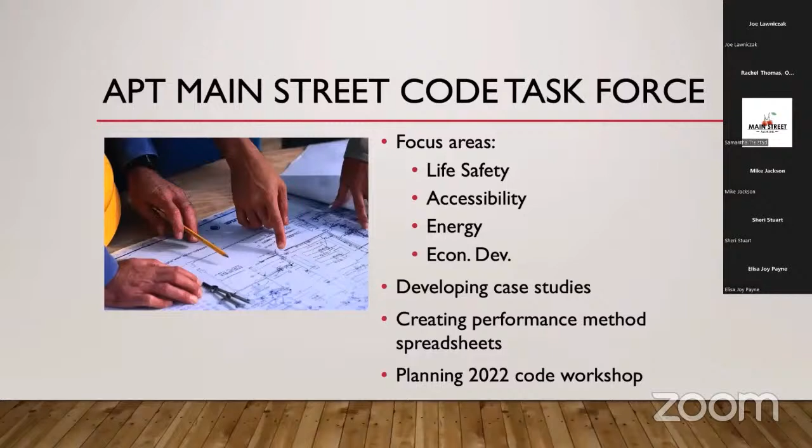We've actually developed an Excel spreadsheet on one of the code methods that we're sharing. So we basically got going in 2020 during COVID, and in '21 we developed it, and now this year in '22 we'll have our virtual workshop in two weeks.

What came out of our effort is this 3-day workshop on building codes on Main Street. It's virtual, so we're going to be across the country. The price is very affordable, and we have a special rate if you're an APT member, a Main Street member, a Main Street community, or a government, meaning a code official. Relative to other conferences, this is a very good price for the amount of training you're going to get. We chose this interesting model of meeting from 10 to 3 Central Time each day, so if you're on the West Coast, that's 8 in the morning, and you'll get your afternoon free. If you're on the East Coast, you start at 11. It's 4 hours of the middle of the day each day, and you can still get some work done. We hope this model works to serve a national audience, and it's not too late to sign up.

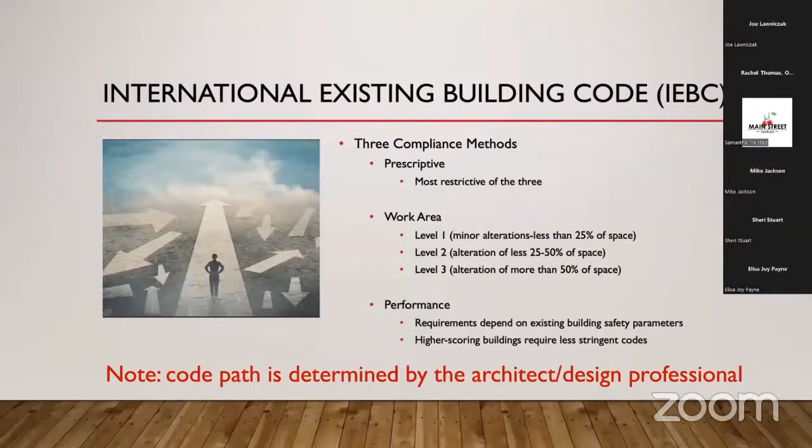You are typically, my audience today—I'm assuming you're Main Street directors, responsible in the community—you're going to want to know what this code stuff is about. Some of you are working with programs to maintain inventories about your buildings and information about them: how big they are, their current use, occupancy, type of construction.

Some of this could be useful for an owner looking at rehabbing, because you may have historic data on the former occupancy of the building and its historic designation or not. So if you're maintaining some sort of inventory of buildings, think about what fields are in your inventory that might be useful from a building code standpoint. Probably you don't have construction type in your inventory if you're looking at occupancy issues, but maybe that's something that would be useful to you.

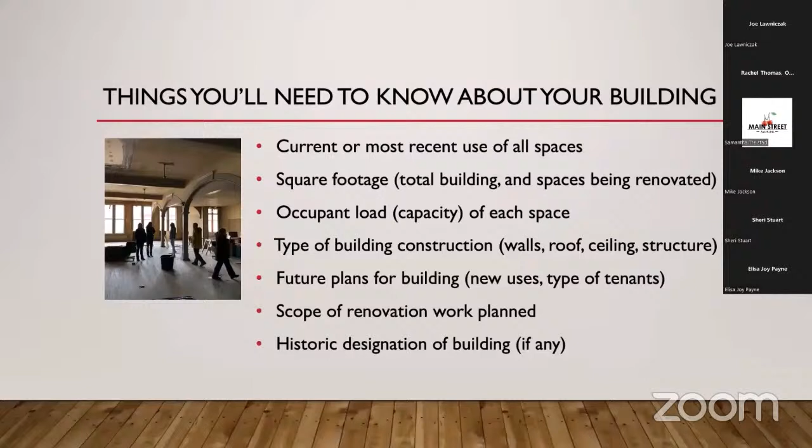Interesting—I haven't talked with the folks at Main Street for a while about their sort of proprietary downtown inventory software, how far they go on that.

But the code, in its most basic way, works from occupancy type. We've evolved building codes over the last 100 years to very carefully start with the assumption of what kind of use is in there, and that use drives the different levels of safety needed. High hazardous use requires lots more things, as does assembly use, where you've got large crowds gathered.

Typically low-end uses with not a lot of people—storage, mercantile, and business uses—are oftentimes very low-end as well. But business and mercantile uses can be higher depending upon what you've got in them. So this is their world—when you get together with code officials, I'll tell you they rapidly move into talking in acronyms.

So I see here that there's 4 different levels of residential use, from R1 through R4. It's always bothered me. R1 is the highest use of residential, larger multifamily and institutional, whereas R4 is sort of the lowest end. I think they got the numbers wrong when they did it, but that's the way it is.

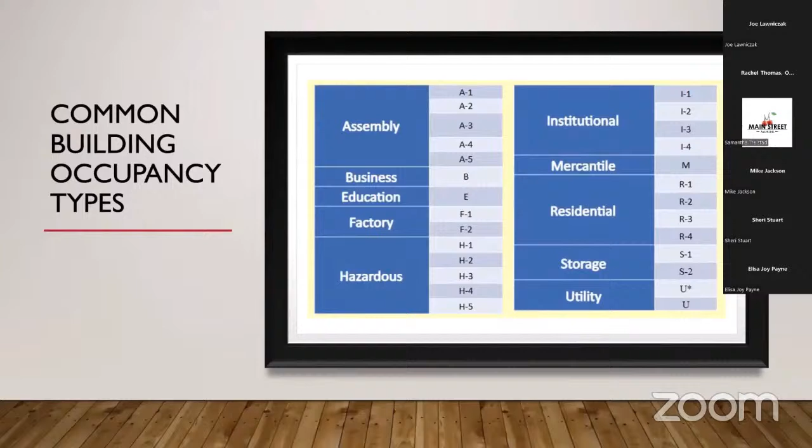So your code people know and will speak in acronyms like this. You're an A2 or an A1, so be ready for that when you get into it with your code official.

Now, this is a very important quote, and it's from the International Code Council's Building Department Administration book. It's kind of a textbook for building code officials. I don't generally read my slides, but this quote's worth your knowing.

The repair, alteration, addition to, and change of occupancy in existing buildings are in many cases more complicated to design and regulate than the construction of new buildings. This is a very important statement because it's recognized widely within the building community that it's actually harder to regulate existing buildings than new buildings.

With new buildings, we can get very precise formulas and apply them, and there are so many different ways things happen in existing buildings that it's really hard to make any existing building exactly like we would do it if it was new. So if your building code trigger says you're supposed to do it like a new building, we know it doesn't always work with existing buildings. So there's a need for a lot of technical alternates and judgment calls in getting there. So that's why it's harder.

And it's more complicated because most building officials and designers are familiar with the new formula and prescriptive requirements. So we've got this perception that only the perfect as the new version is safe, when there's a lot of ways that gray areas can be covered. So there is flexibility needed.

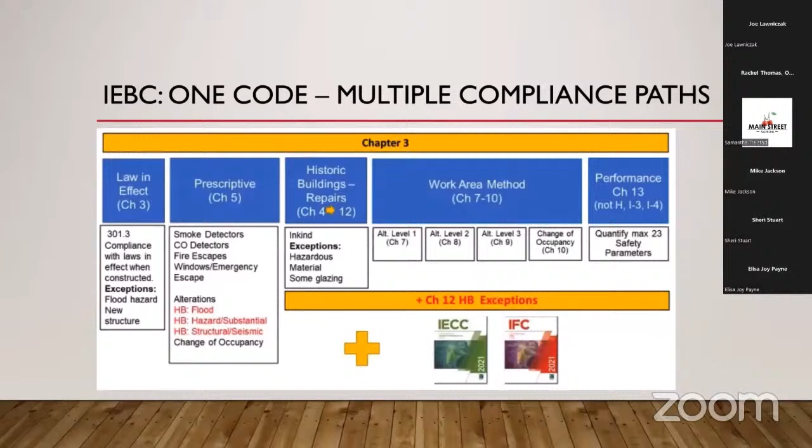Now, one of the really great things that happened in the move to the IEBC from the previous codes was the way in which they stepped up what the owner was doing as elected work versus what would be required if you did more work. In the old code versions, it basically said if you spent more than 50% of the value of the building, you had to make it like a new building. Well, what if you spent 25%? Then what? There was no gray area in between there. It was kind of like all or nothing.

What this code does is it raises a series of triggers, and the more work you're going to do, the more then are the mandatory things that come with your work. So it's more proportional. And this works very well if you're not changing the occupancy. So if you're just doing repairs, it's pretty easy to work with the International Existing Building Code. Repairs with like materials are permitted with historic buildings.

Then there's alterations 1, 2, and 3. Alteration 3 gets to more than 50% of the building area, and it could be a gut rehab, but it's still within an alteration. So if you don't change the egress requirement or the occupancy type, you can do a gut rehab and work with your builder on that in alteration level 3 typically.

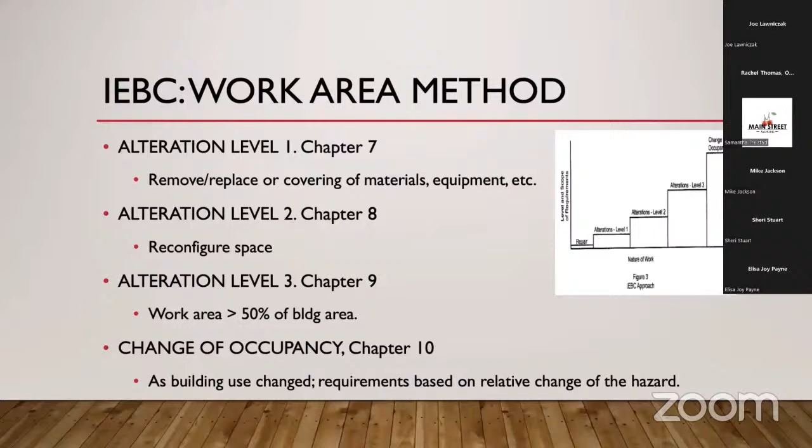So generally, I want to give a lot of fairness to the IEBC on the way in which it works with existing buildings and continued use. However, once you hit change of occupancy, now it's a much different chapter and you don't get much breaks for historic buildings. So change of occupancy still drives - it's still a big driver on Main Street downtown when you're doing a change of the second floor.

Now, just to dig a little deeper on this staggered work of the alterations - repairs means in kind, and it states that you can repair anything that's historic with like materials, and the only exception is you can't use lead paint or asbestos containing materials. And if you have to replace glass, you can't put non-safety glass in doorways and display windows below a certain dimension. So there's a couple of things on glazing, but generally like things are permitted.

And most of these levels of alteration can generally be done without a licensed architect stamp on the drawing. It can be done with the local builder, because if you're not changing egress and any use requirements that are in demand, it's easier to review. So that's actually pretty good.

Now, once you get into new additions, that's a separate chapter, and new additions are treated as if it's a new building. So new additions, you don't get any breaks. You got to design it to what the new requirements are.

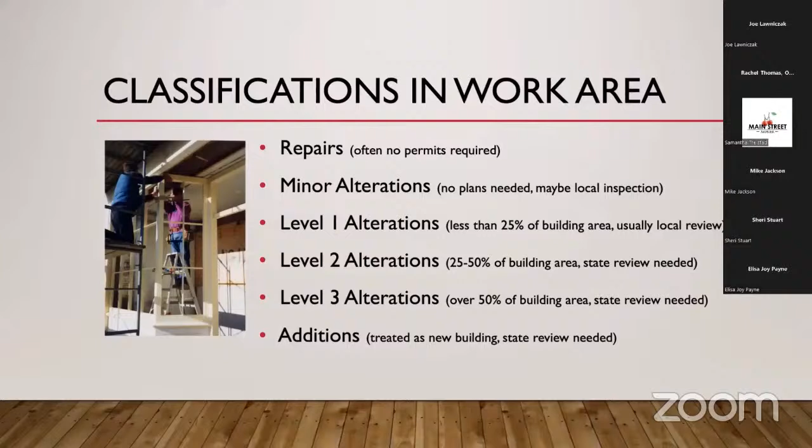Now, the biggest issue that we have seen for complications is in fire safety. And fire safety, the triggers are what type of occupancy - assembly, and hazardous use. And you typically are not going to have many hazardous use - that's really industrial things. But you might have an assembly occupancy, more than 50 people in a room. So that's higher hazard. So that's going to be an issue.

But the codes are really weighing factors like your exit capacity in terms of number and size of exits and travel path. There's also what we call compartmentalization - the fire ratings, passive controls. A 1-hour rated wall assembly, a 2-hour separation between the first and second floor, a 30-minute door. These are compartmentalization systems, old systems in place to basically use what has worked very well historically. Compartmentalization was the primary residential code system of fire safety well up into the 1970s.

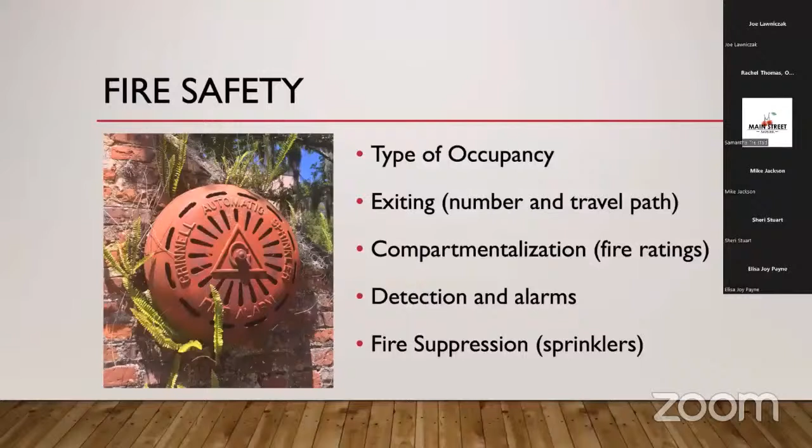Then we added detection and alarms, and pretty much smoke detectors are required everywhere. It's a baseline, it's important - it's the most important safety feature for fire safety you can have, and they're inexpensive, easy to install. Lastly, though, is sprinklers and fire suppression systems, which typically tend to be the most costly system to install, and the most difficult one, where we find probably the most issues with the use of the building code and costs.

Now, if you have a 3-story and more building, the building code typically says you need 2 exits. There are some exceptions and ways around that. So 3 stories and above, you're typically going to need 2 means of egress. 2 stories, you can have up to 4 units with 1 means of egress. And if you put sprinklers in the building, you can have longer travel distances, but sprinklers don't give you any breaks on the exiting, which I find somewhat odd. I think there's some push to say if you put sprinklers in, you ought to get some breaks on the exiting, and there's some national stuff coming on that. It's interesting, we're tracking it.

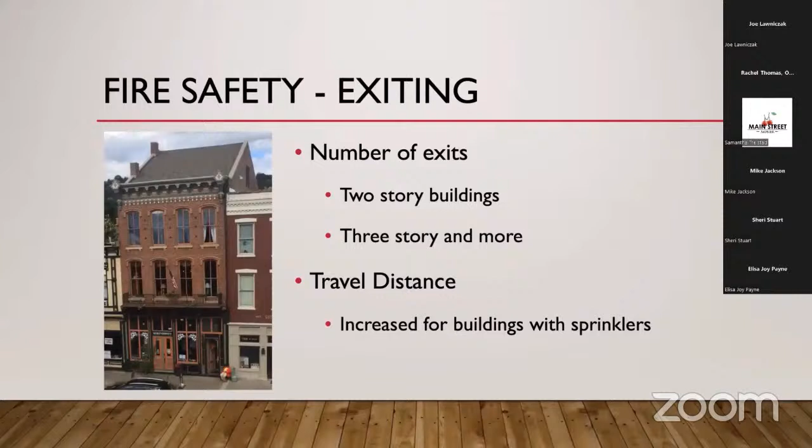Now, there is a whole separate chapter on change of use, or actually the technical term of art in the code is change of occupancy. So you can have a use within an occupancy classification. Like in residential, you've got 1 and 2 flat, and that's R3. If you go multifamily, that's R2. So that's a change of use from R3 to R2. Change of occupancy is when you go to a different type of occupancy. So the code classifies use and occupancy slightly different.

And the code has some hazardous categories that it attaches to means of egress, height and areas, and exposure of exterior walls. Most of these are not going to affect you, but means of egress is the one that we see the most issues with. A sprinkler system installed throughout the area where a change of occupancy occurs is the most common interpretation you're going to get from a building official. So if you have an early meeting with your building official and say you want to change the occupancy, do not be surprised if they say, well, then you're going to need a sprinkler system, because that's kind of been the baseline sense of the trigger point. There's some ways to work with improving the safety without that, and that's where we know about the flexibility in the code now.

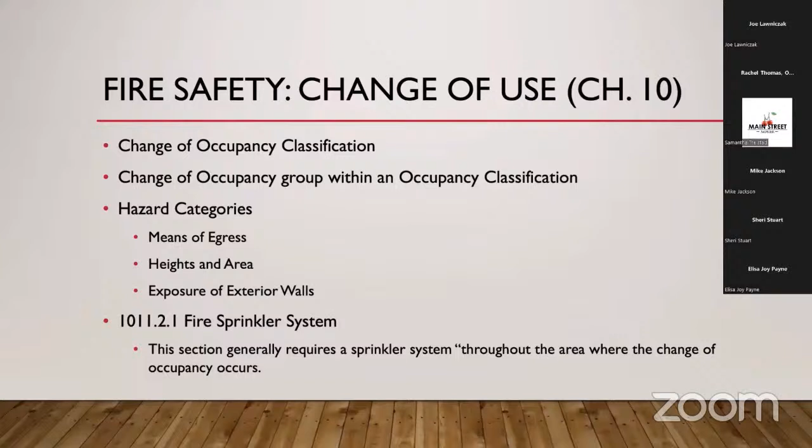One note about change of use: vacant is not a use. So if something has been upstairs and hasn't been used for decades, there's something like storage or warehouse as a use, but vacant is not a legal use - it's just a temporary condition. The term of art would be, what was the last known legal use? So if you go upstairs and it's been unoccupied for 40 years, but there's a kitchen up there, well, that probably was residential. And if you use your city directories, you can research when was the last time somebody lived up there.

One of my favorite things to do when I go upstairs and look at a building that literally hasn't been lived in or used for years, is I look around to see if there's an old calendar on the walls or newspapers or something sitting around with a date on it, to figure out when was the last time somebody occupied this. I was once in a building in the 1980s, and there was a closet full of clothes from the 1930s. When was the last time somebody lived there? Somebody left in the 30s, left a closet full of clothes and never came back. So, it happens.

Something really interesting in this issue: the California Historical Building Code allows any known prior use to be determined and used as a basis for what the use is today. So if you have a second floor that hasn't been occupied for decades, and it was last an office, but you find out that when the building was built in 1910 there was an apartment upstairs, under the California Historic Building Code you can say there was a prior use of an apartment up there, so if I put an apartment up there now, there's no change of use trigger or change of occupancy. That's actually a very interesting provision. I really like that, allowing any known prior use. I'd like to propose amending the national code to do what California does.

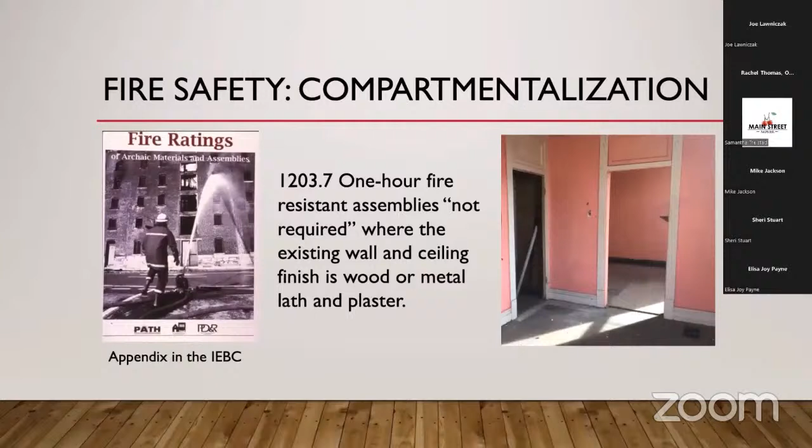One of the more frequent irksome issues I've encountered is that when doing a change of occupancy and putting residential use on the second floor, the code now says you need a 2-hour rating on the ceiling of the first floor and the floor of the second floor. If you have an historic tin ceiling on the first floor, it really only has about a 15-minute fire protection rating, so you don't have a 2-hour rating.

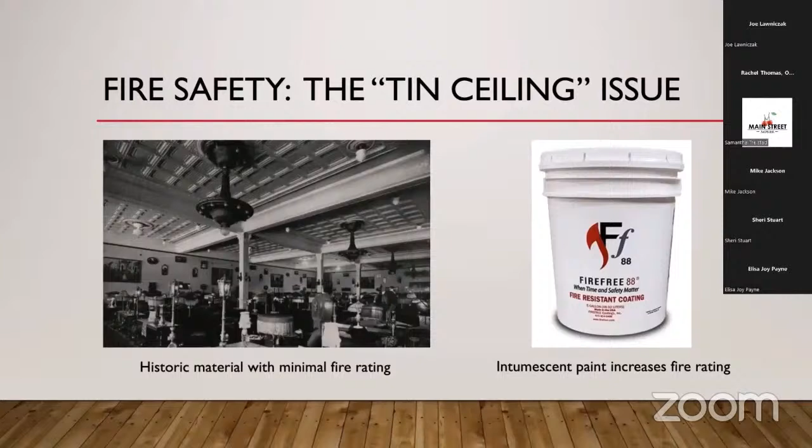But believe it or not, there's something called intumescent paint, and FireFree 88 is one brand of that. You can paint a tin ceiling, and instead of a 15-minute rating, you get a 1-hour rating by coating it with that. If you get the other hour of rating from the ceiling, the substrate, or insulation, there's a bunch of different ways to modify the assembly to get to 2 hours. This has been a very efficient tool for improving the fire separation rating without removing the historic tin - it's really pretty impossible to take a tin ceiling down and put it back again; they just don't come down easily and go back. So this is an interesting new technology to make a building much safer. In a number of the historic communities I'm working with, it's now very commonly used for both tin ceilings and even sometimes wood and other substrates.

In our upcoming workshop, we're going to spend a lot of time talking about the fire safety performance method. This is a separate method within the code that has 23 different categories of fire safety, with a scoring system. You look at how big the building is, how many exits you've got, what's the fire rating of the materials, whether you have sprinklers or not, and what level of fire detection and alarm systems you have. What this does extremely well is, instead of just saying put sprinklers in and you're okay, it gives the code official information showing: I made my building safer - I improved the alarm system, I improved the egress system, I improved the fire separation system, and all these things gave me safety score points, and I scored enough points to meet the requirement.

And this is where you cover the gray areas - so if you didn't get to a 2-hour rating, but you got to an hour and 50 minutes, this system kind of takes that into account. So it really is very useful. It works very well for small Main Street buildings.

If you're under 3,000 square feet, 2 stories, this system really works well. It's more complicated to use, and most code officials and architects don't know how to do it. Our training coming up in 2 weeks will spend 2.5 hours taking people through a detailed level of how to use this scoring system. We're putting an Excel spreadsheet on how to use this on our APT website and providing it for free to everybody. We really see the advantage of this, and we're spreading the word that this is a great new tool for fire protection evaluation.

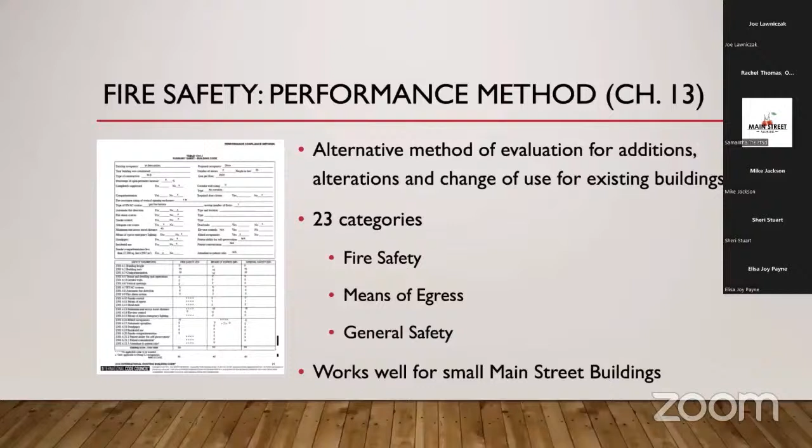In general, I will make a conclusion that if you put sprinklers in the whole building, generally most of the fire safety issues go away. So we know sprinklers work, they provide much greater level of safety for fire, but sometimes that becomes the most expensive option, and therefore the other options of approved alarm and detection and confinement become the more cost-effective ways to go.

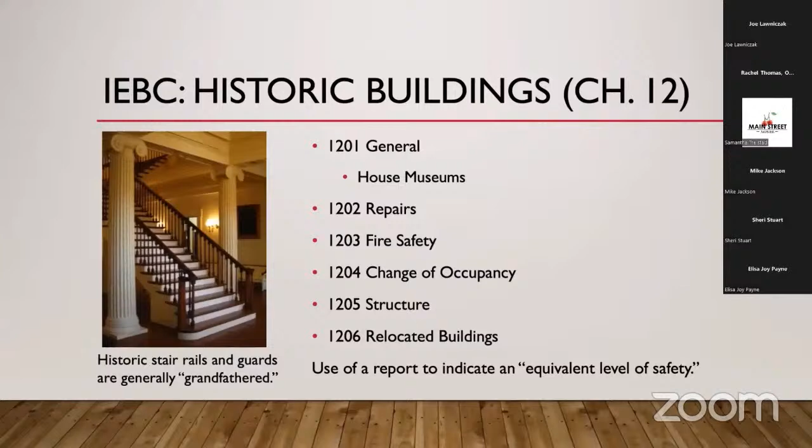Now, the Energy Conservation Code takes the report format to a slightly different format, but it basically says if you have a historic building, the provisions of the Energy Code are not mandatory if a report's been submitted to the code official, and here's the exact words, demonstrating that compliance with the provisions would threaten, degrade, or destroy the historic form, fabric, or function of the building.

So if you have your original wood windows, you do not have to replace them to make them meet the new energy performance standard, because it's the historic authentic feature. Now, if you don't have your original windows and you got vinyl replacement windows from the 1980s, that's not an authentic feature. So whoever's writing this report has to say what's there is authentic.

And if it is, the code official is just to accept your word. The code official can agree that this applies. So the way this is written, it basically gives great authority to the design professional to make this assessment of both, is it a historic feature, and would the action required threaten or damage the character of the building.

Where we've been seeing this used a bunch lately is people have exposed brick walls and they don't want to cover it up to put insulation in. And if it's an old warehouse and it's always been exposed, then that applies. So it's a little gray area. If originally it was a plaster wall and you took the plaster off to expose it, that's not necessarily the authentic feature. So that's a little gray in the zone about using this provision.

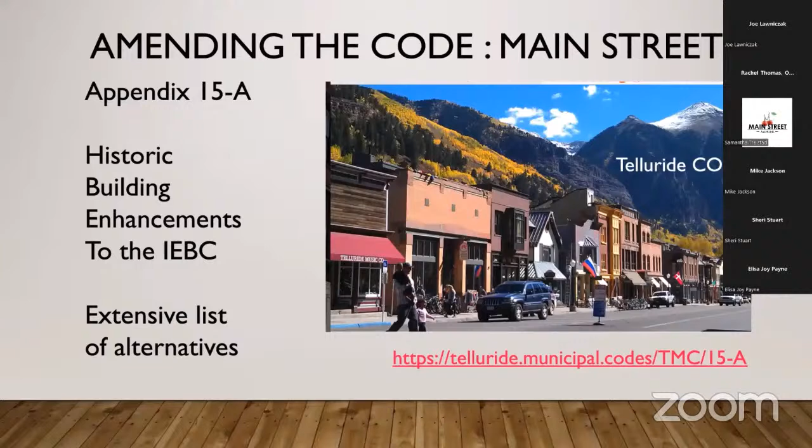So immediate action now is sign up for our workshop. The stuff I've talked about today is kind of the tip of the iceberg. The 3-day training we've got coming up in August is going to be much more detailed about all these things. But now I hope you understand how important the building codes are to preservation and redevelopment.

One final note on this: if you were at the National Main Street workshop in Richmond this year, the town meeting, the National Main Street Center said making housing a part of your priority for your downtown should become more and more something on your work plan. Housing is critical to the future, getting those empty buildings used and looking at the areas around your downtown. So we think this code stuff is all related to the housing initiative.

So these are all going to go together, and our task force is working with the National Main Street Center as it wants to move forward on this. So that's my story, and I'm sticking to it. Thank you for attending this session today. I think, Jerry, I'm kind of on target for my 10-minute questions and answers at the end.